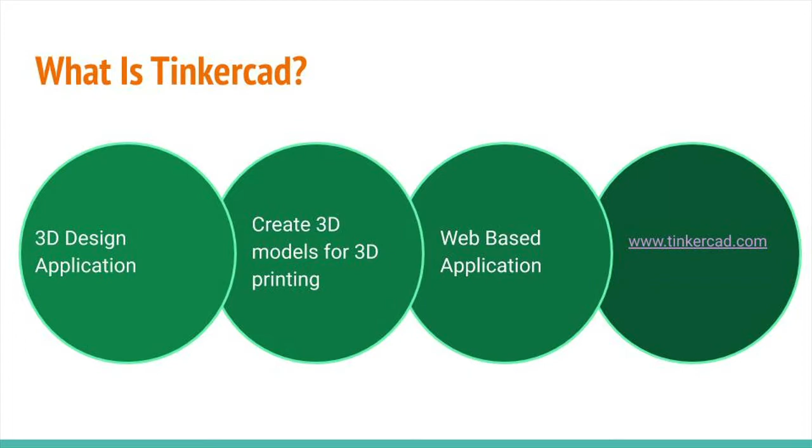Okay, let's start with some basic skills. First, navigate to tinkercad.com in your web browser and click on Sign in the top right.

If you're a new user, you'll need to create a username with a password, or you can use your existing social media accounts to sign in. I will use my Gmail account.

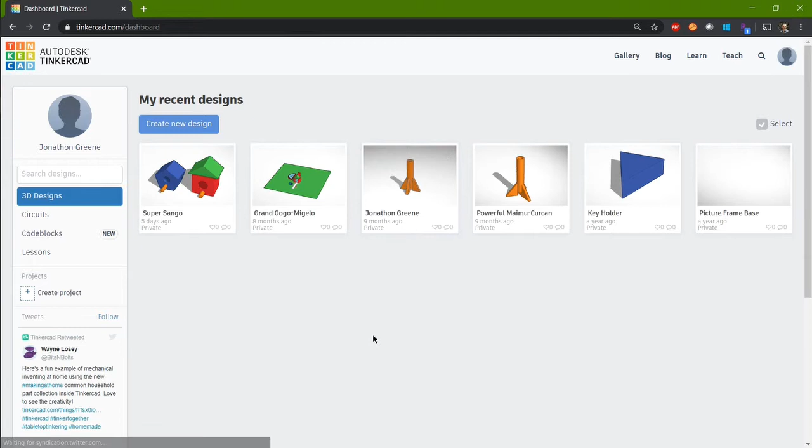Then you'll be brought to your dashboard page where you can see all of your designs. Click on Create New Design.

And now you'll start with a fresh new design. So first, let's learn the basics - how to move around and navigate your new design.

To rotate, you're going to click and hold the right click on your mouse. To pan, you're going to click and hold center click on your mouse if you have a center click.

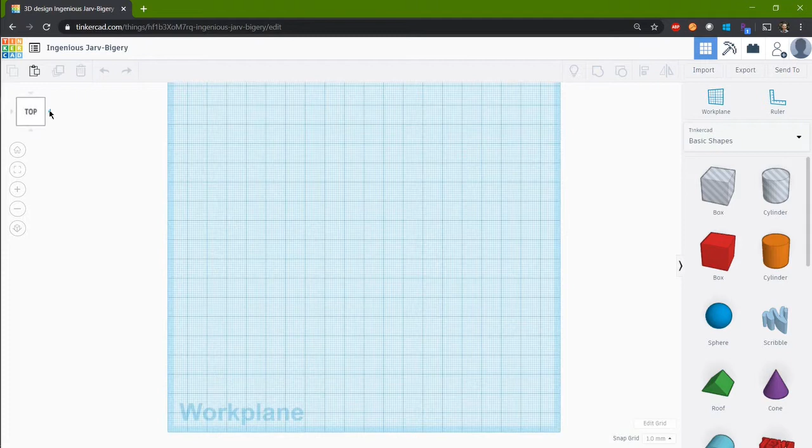Additionally, to rotate, you can also grab the block that represents the workspace in the top left and rotate around. If you'd like to view from the top, you can simply click on the top view, or the right view, or the bottom view, and your view will change.

For now, we're going to view the entire workspace. If you'd like to zoom in and out, you can use the scroll wheel or the plus and minus button if you don't have a mouse.

And it's really important to get used to these navigation skills because we'll need to navigate and move the workspace around quite a bit while we're working with our models.

Okay, you'll see this blue outline called the work plane. This is the space that we will work on. So if I were to grab a shape, such as this box, click on it, and click on somewhere on the work plane, you'll see it places it on the work plane. New shapes will always get placed on the blue work plane.

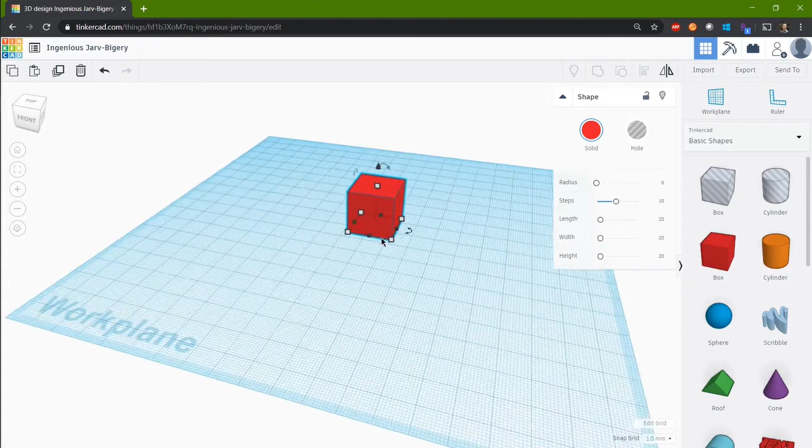Now this shape is a box, and we can control its dimensions by changing the white boxes. So we can change the dimensions to 30 by 30 millimeters by entering the number, or we can click and drag the dimension to change it as well.

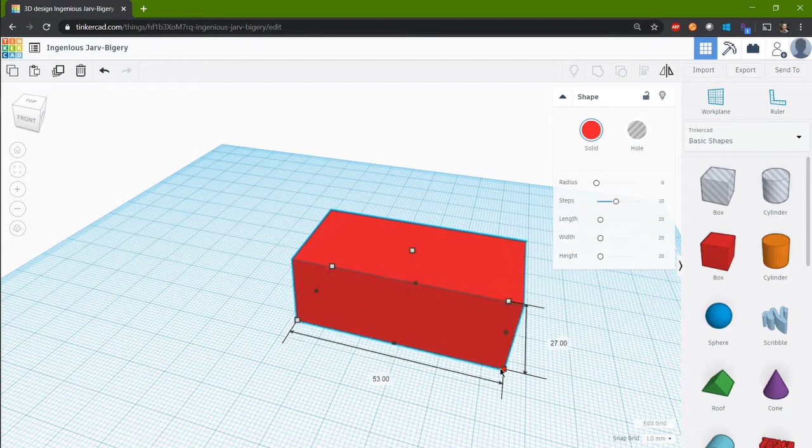The white box on the top will control the height. You'll notice there are arrows. These arrows allow you to rotate the box. We will not use these arrows very often.

The black boxes allow you to control a single dimension at a time, whereas the white box allows you to control 2 dimensions at a time. And finally, the black arrow at the top will allow you to lift the box off the work plane. At any time, you can change the amount that you're lifting the box or the dimension that you're altering by entering a number.

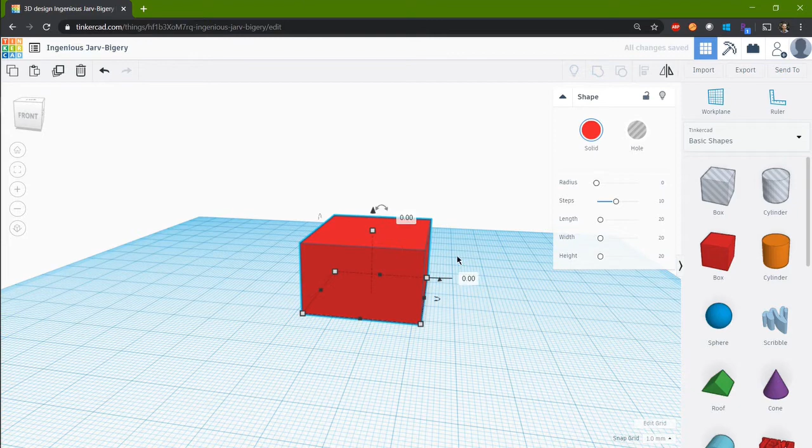Now, say we wanted to select this box. We can use the lasso tool, which is just a left click and hold, and select the box in the viewable area. And now the box is selected again.

If we wanted to copy and paste this box, we can either use the duplicate and repeat button here, or Control C, Control V on the keyboard. And you can see I've made an exact replica of the box.

If I want to delete a box or a shape, I simply select it and press delete, or I can select it and press the trash can button. And of course, if I make a mistake, there's an undo button here, where I can undo and redo my last few actions.

Now, I mentioned earlier that objects are only placed on the work plane. But what if I want to place an object on top of this box? Well, the answer is I would have to move the work plane. So here I would select the work plane tool, and I would move the work plane on top of my box. You can see now it's above the box.

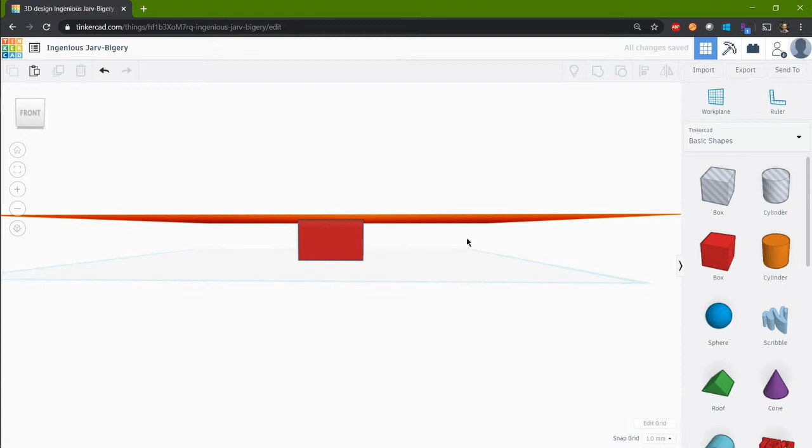Now any object I place is going to be placed on that work plane, which you can see is above the box. And then I can move my work plane back and continue to work with my shapes.

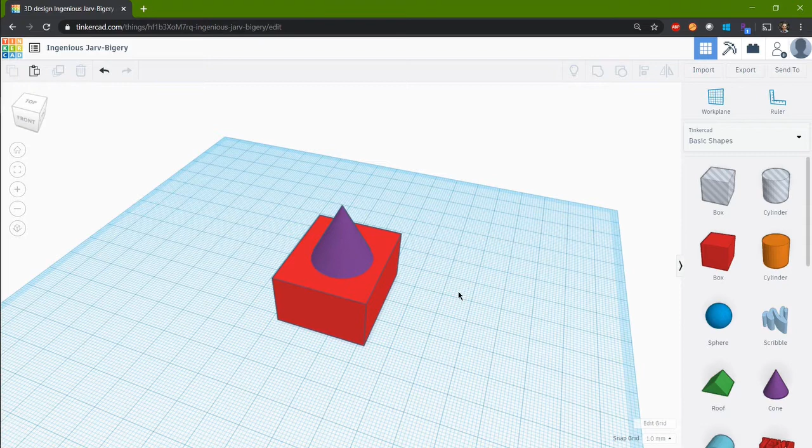So we've covered some basic skills: how to navigate the work plane, how to move the work plane, how to place basic shapes, how to resize basic shapes, how to use the lasso tool, how to copy and paste, and how to move objects onto a new work plane.

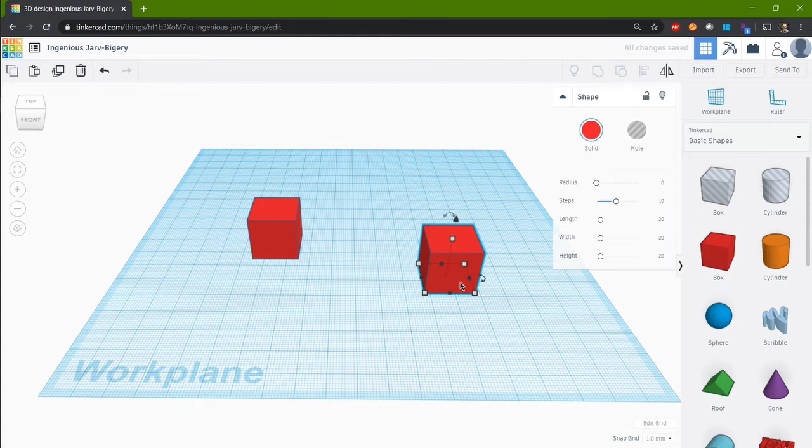Next, we're going to learn an intermediate skill called the Align tool. The Align tool is a precise way to align two basic shapes with each other. So what we're going to do first is we'll place a box, and we'll place another box. We'll change the color of the second box so we can tell the difference between them.

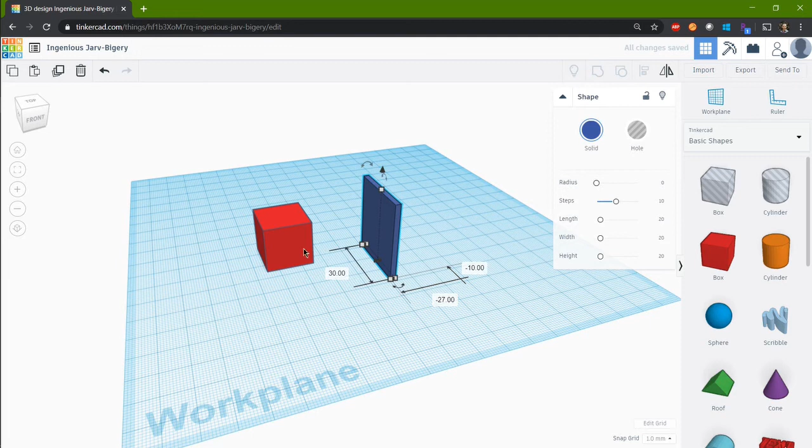And we'll also change the dimensions to be 2, very thin, by 30. We'll also make it a little bit taller. Okay, the object is going to be to align this shape inside this shape. We could use the arrow keys and try and line it up this way and this way. But we may not get it right, and it may prove to be a little difficult. We never know if we're exactly in the center.

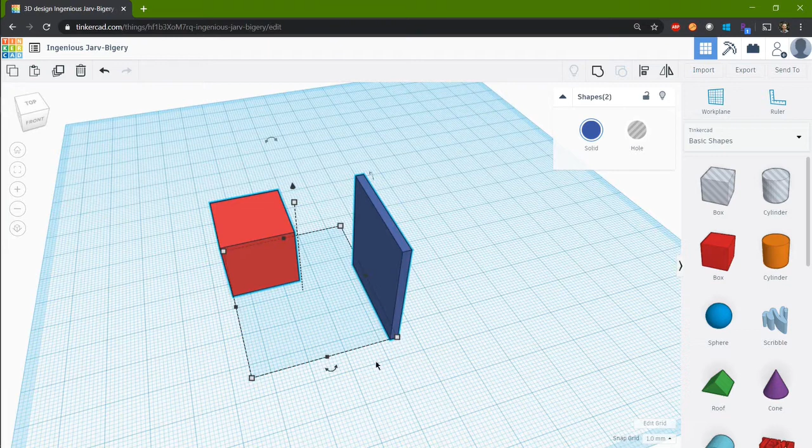So instead, what we'll do is we'll click on one shape, hold Shift, and click on another shape. And now you see we have them both selected. What we'll do is we'll click on the Align tool, or press L as the keyboard shortcut. And this gives us many small black circles. These black circles will help you align the two objects in the direction that the black circle lines are pointed.

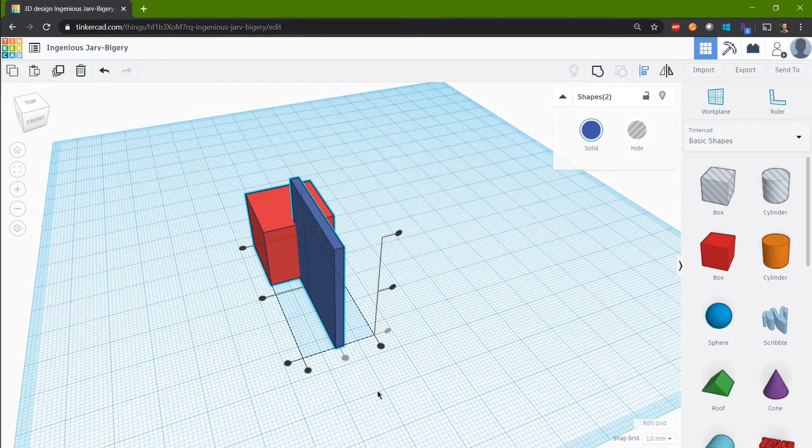So say we want to align in this direction here. We can mouse over one of the black alignment dots to show you in a preview what the objects will look like after we click on them. So this will align about the center of both objects. Notice that the black circle is now grayed out because we can no longer select it as it's already aligned in this direction. Next, we want to align in this direction.

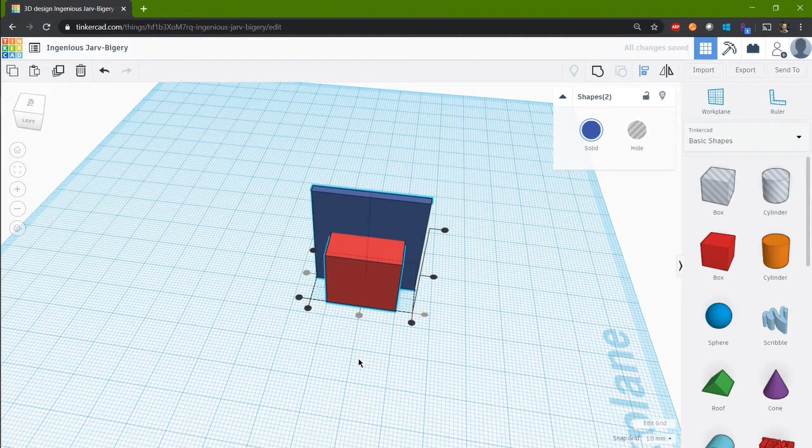If I were to use this black circle, I would align about the left face of the red square and the left face of the blue square. If I wanted to align about the center, I simply click on the center circle. And that's how you use the Align tool.

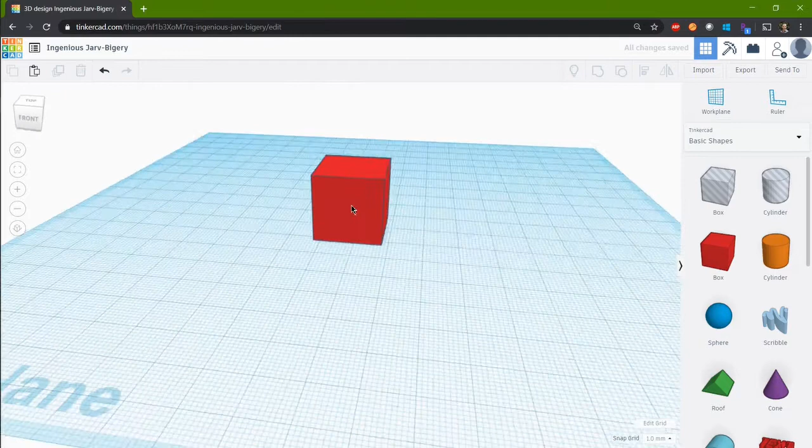A simple way to practice using the Align tool is by building a very simple house. Start with a box as your main floor, and you'll move the work plane to the top of the house and place a roof. Now, the first thing would be to align the roof to the base of the house. So I will select both, press L for align, and make sure that I am aligned about the center in both directions. And now you can see my roof is square to the rest of my house.

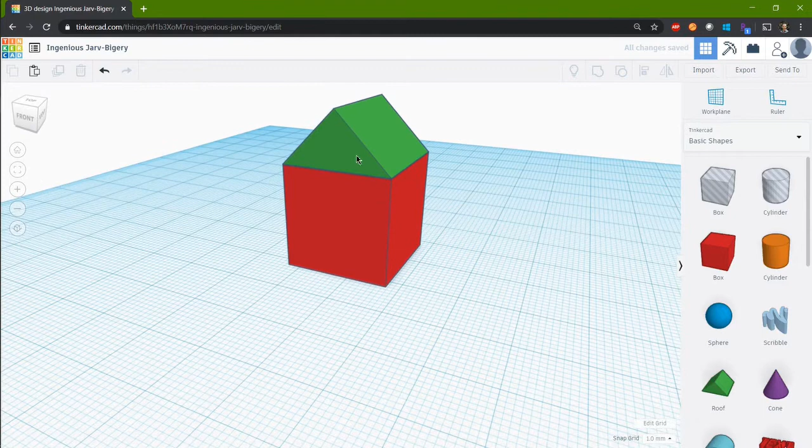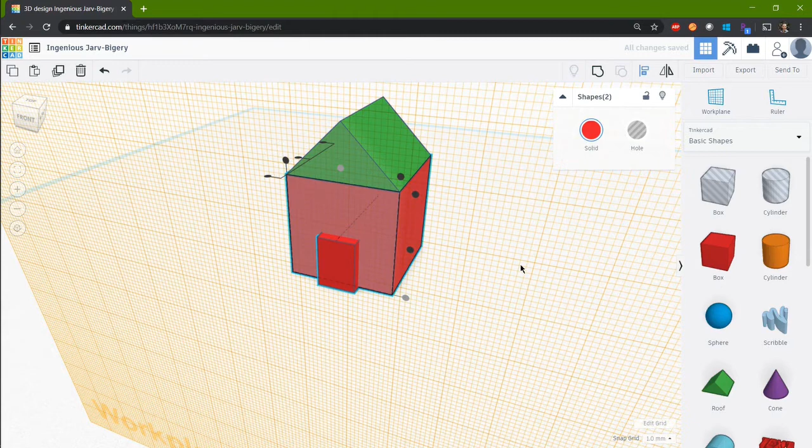As a simple exercise, go and use the workplane tool and basic shapes, as well as align, to build your own house. You can make it as complicated or as simple as you'd like. And remember to have fun while you're doing it.

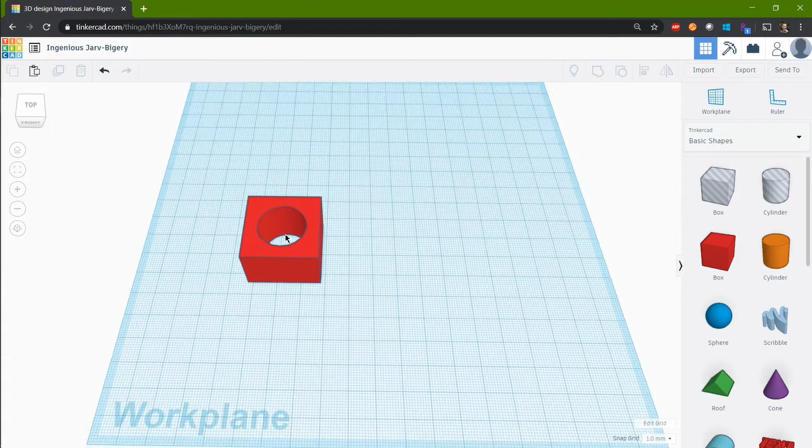Next, we're going to learn a tool called the Group tool. The Group tool will help you create new basic shapes when the basic shape you need is not automatically listed. For instance, this square with a cylinder cut in the middle, as shown on the left. In order to build this part, we need to understand what two basic shapes created it: a box and a cylinder. So let's start with a box. We're going to change the dimensions for this demonstration to 30 by 30.

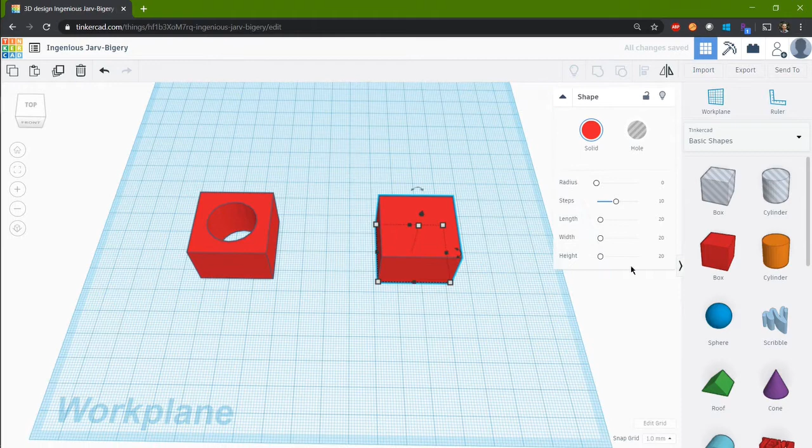And now let's start with a cylinder. Now, instead of this cylinder being a solid, we want to use it to cut a hole in a solid. So we will change the property to hole. And this can be done for any basic shape. Next, we're going to get this hole cylinder in the center of the box. We'll do so by using the Align tool.

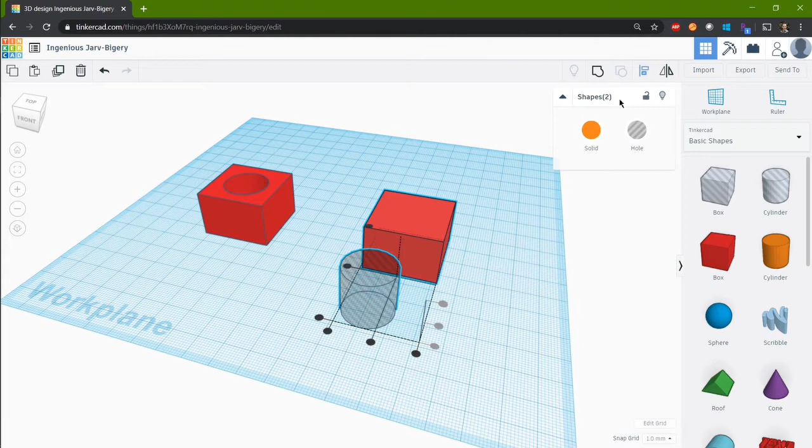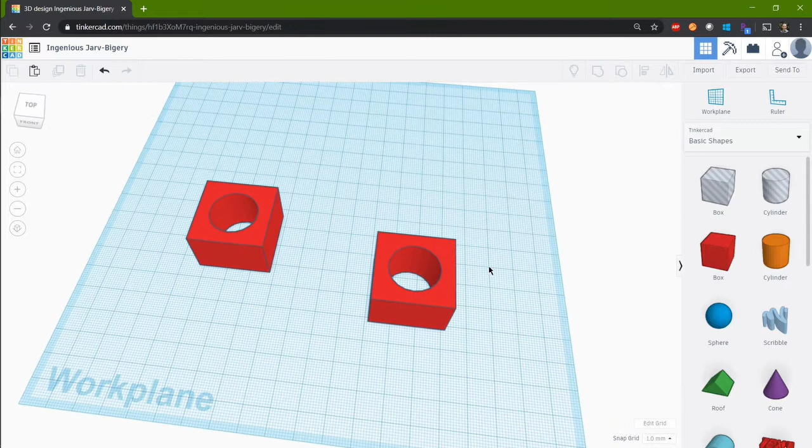Finally, we will take the box and the hole cylinder, select them both using the lasso tool, and we will use the Group tool, which is located up here in the toolbar. Once we click Group, the hole shape will cut a hole in the solid shape. And now you have the shape that we started with on the left. You can also undo your change by ungrouping. And then the two shapes become separate entities once again.

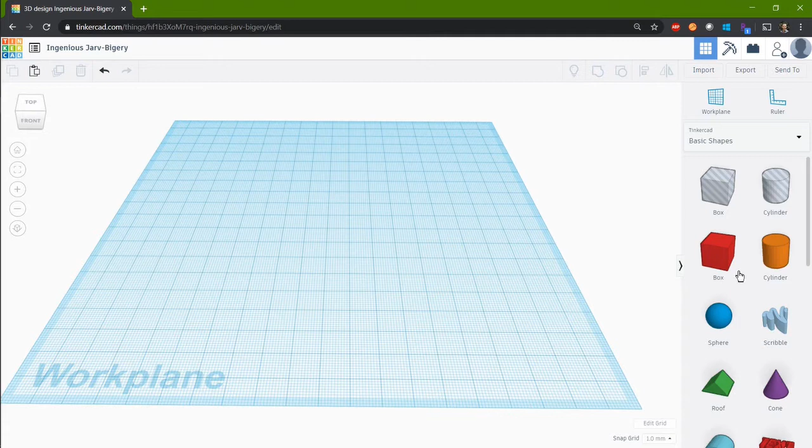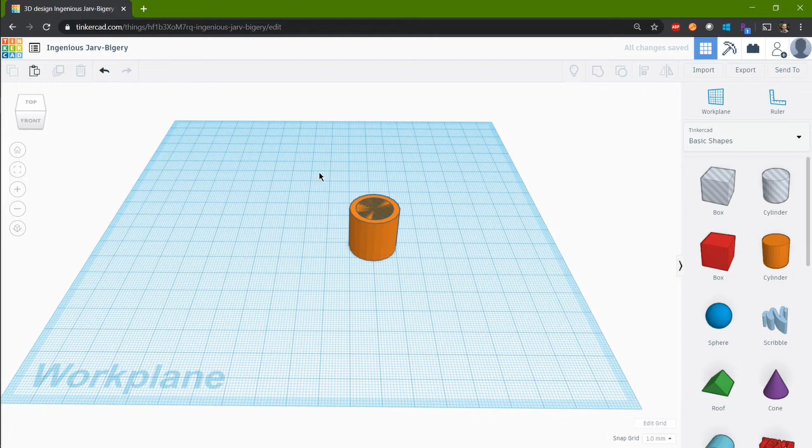A good way to explore the Group tool is by building a very simple cup. Let's start with a cylinder and a cut cylinder. We will make the cut cylinder smaller than the solid cylinder, and we will use the Align tool to align them about their centers. Once they are centrally aligned, we will select them both and click Group. And we don't quite yet have a cup because it has no bottom.

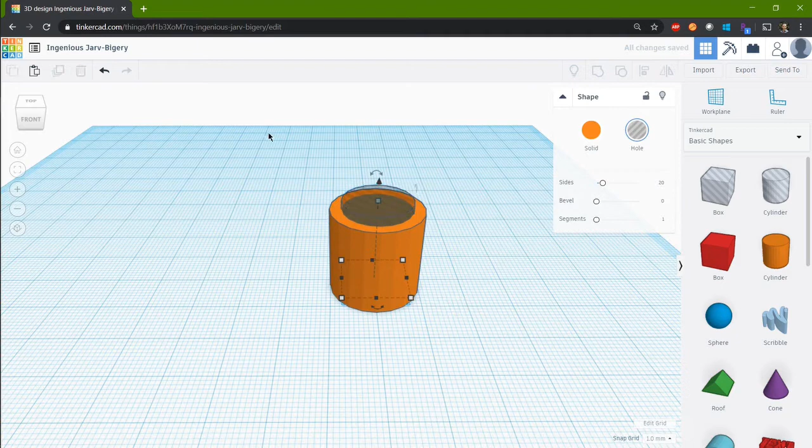So what we will do is we will ungroup, we'll select the cut cylinder, and we will use the black arrow to raise it up just 2 millimeters. We'll select them both and click on the group icon again. And now our cup has a bottom. You can take this demonstration to the next level by using the Group tool to add a handle and make it a mug.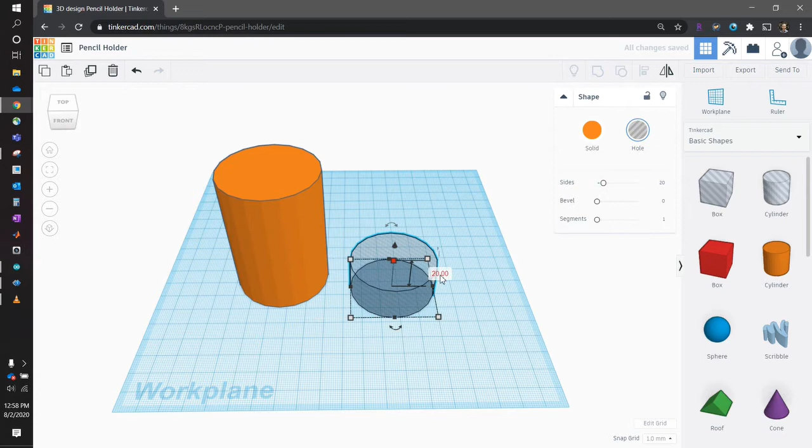You'll notice our cylinders are supposed to be circular at the top, but there are some straight lines along the edge. That's because computers don't actually know how to produce curved lines. They only know how to use straight lines. But computers get around this by using many, many straight lines to replicate what looks like a curved line. You can demonstrate this by increasing the number of sides of each of your cylinders. And as the number of sides gets higher, the more it looks like a circle.

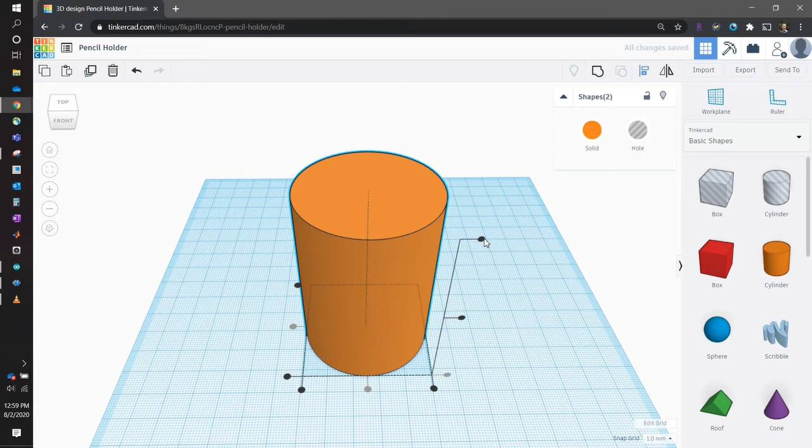Next, we're going to align the cut cylinder inside the solid cylinder using our align tool in this orientation and this orientation, as well as the top. This enables our pencil holder to have a base so your pencils don't fall out. And then finally, you can select both and use the group tool to actually produce the cut.

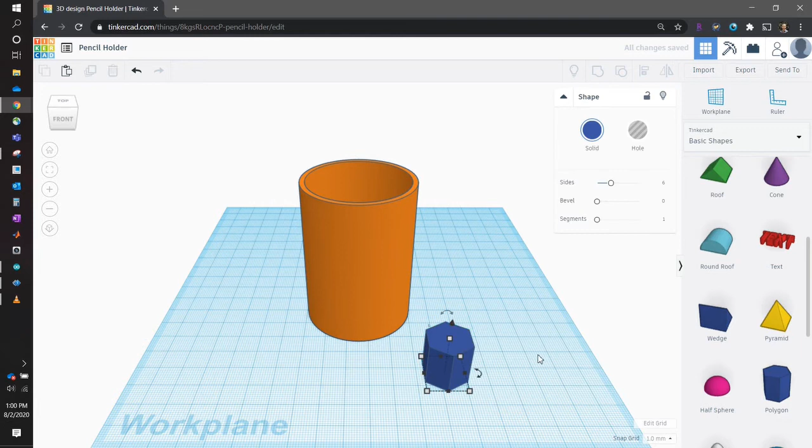Great. Now comes the creative part of our design. Feel free to add any shape that you'd like, but for this demonstration, I'm going to create a series of cutouts on the pencil holder using an octagon. So first I'll grab the polygon tool, and I will change the number of sides on the polygon from 6 to 8. That makes our shape now an octagon.

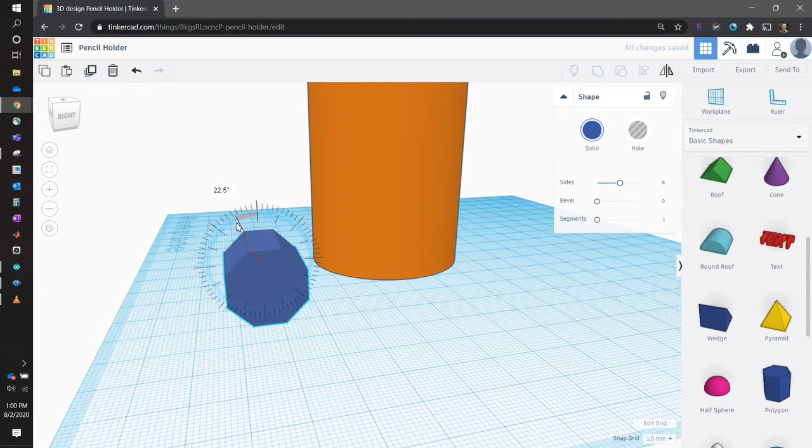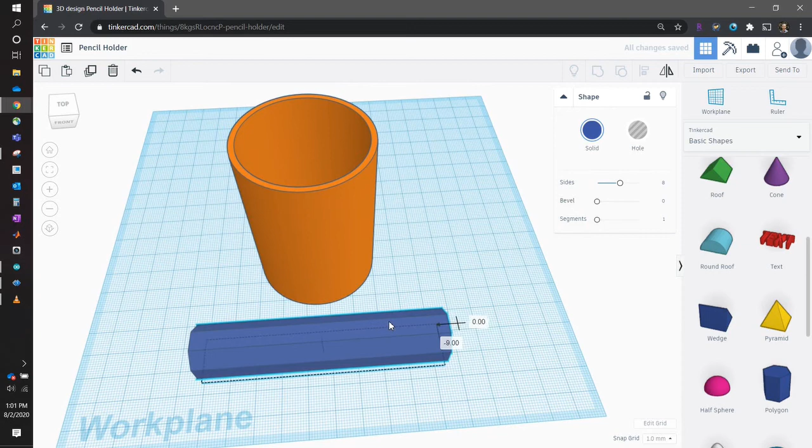Next, I'm going to rotate the octagon 90 degrees in this orientation and 22.5 degrees in this orientation. That way it sits flat on the work plane. Finally, the last thing I'm going to do is increase the length of the octagon. Doesn't matter how much we increase it by, as long as it's longer than the cup of the pencil holder. And you'll see why in just a moment.

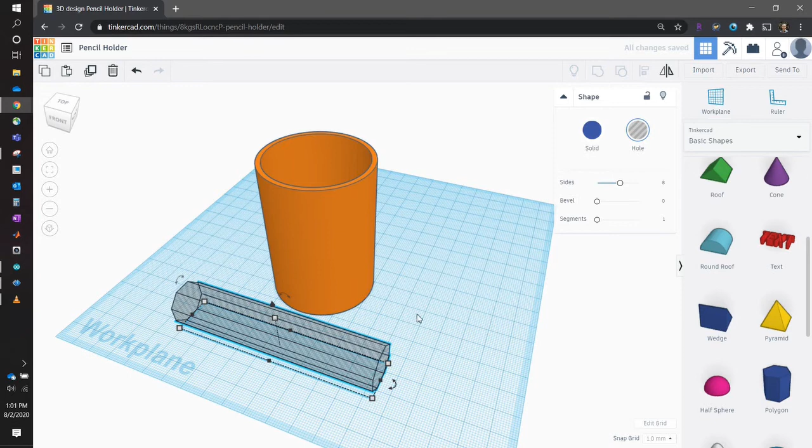Okay, the next step is to change this polygon from a solid to a hole. This is what we're going to use to cut out the shapes in our pencil holder. Then we'll select both the pencil holder base and the polygon, and we'll align them in this orientation and this orientation so it's centered.

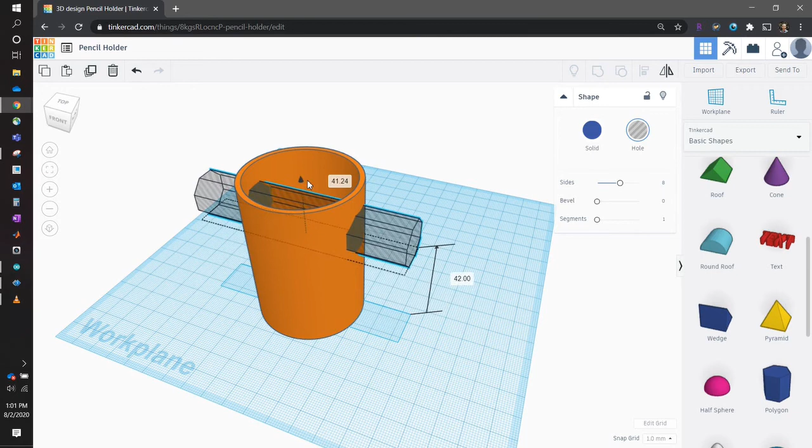Finally, we're going to grab our polygon shape and raise it up to about 42 millimeter. And you now see that if we group these two objects, the polygon is going to cut a shape out of our pencil holder. We can demonstrate this quickly. Now this is very cool, but we do want to repeat this pattern a few more times.

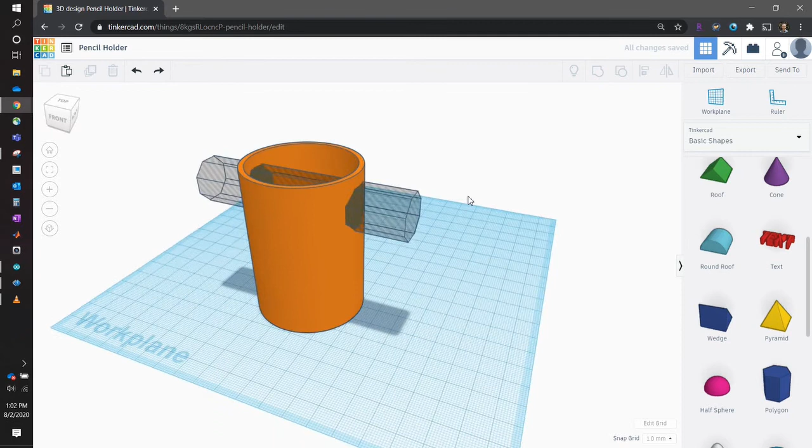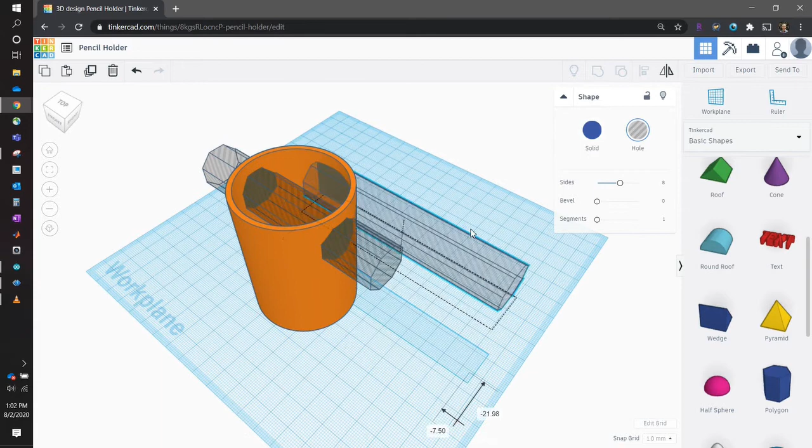So we're going to ungroup what we had just grouped, and we're going to grab our polygon. We're going to copy and paste. To do so, you can either use Control-C for copy, Control-V for paste, or the copy and paste buttons here. We're going to take our shape that was just copied, and move it out of the way, just for a moment.

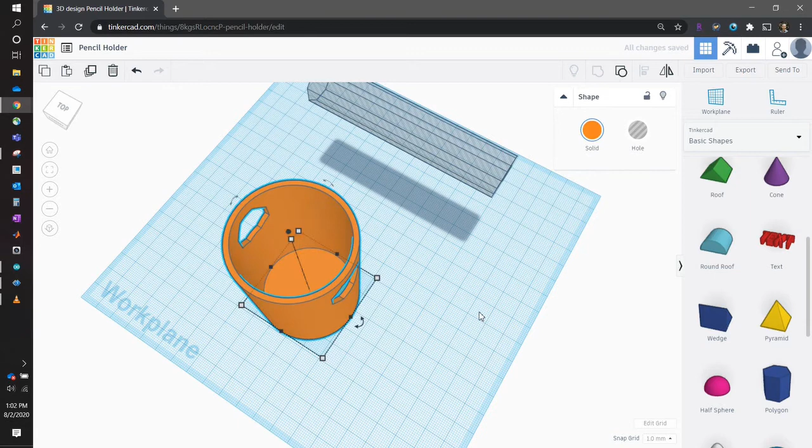Next, we're going to group just the first polygon and the base of the cup holder. And you'll see why in just a moment. Let's go back to our second shape. We're going to rotate it 90 degrees. And we're going to align it with the base of the cup holder, just like we did the first polygon, in this orientation and this orientation.

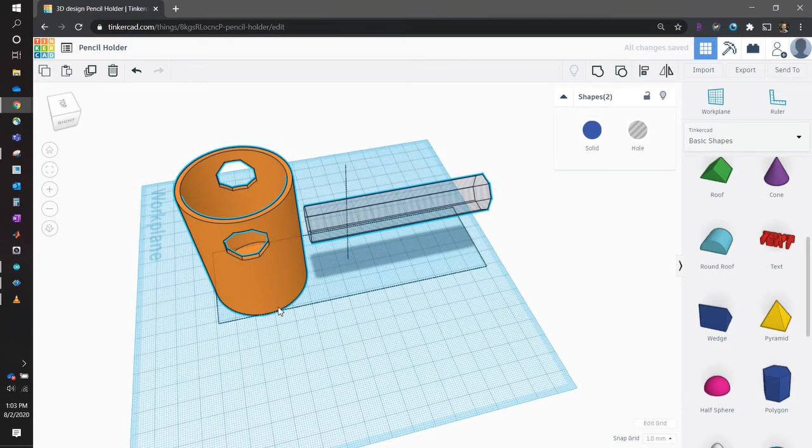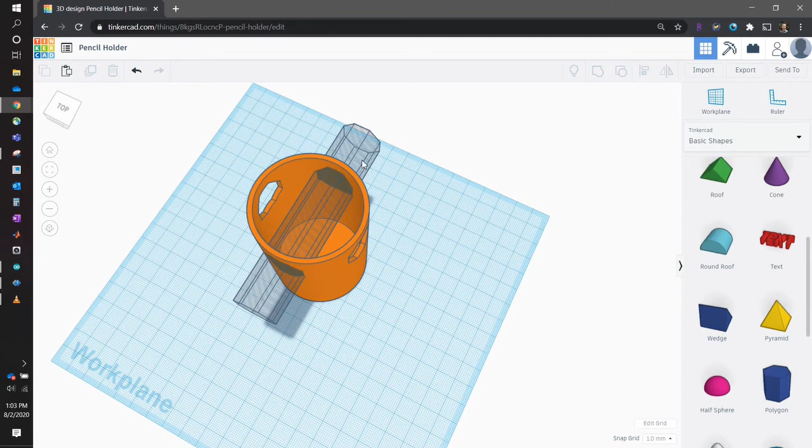And now we have two octagons offset 90 degrees from each other. Now, if we were to group it, it would produce a pattern of cuts that looks pretty cool. We're almost there. We're going to repeat this pattern of octagon cuts along the rest of the height of the piece. But to do so, we need to ungroup twice.

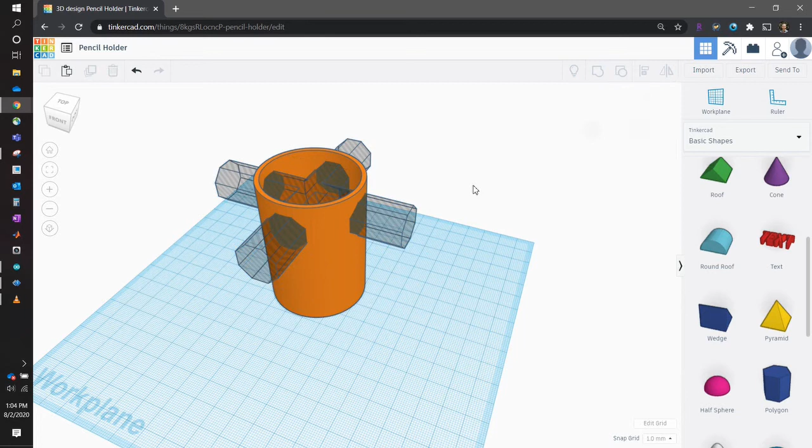We're going to select both of the cut polygons, and group them together. That way, when we copy and paste them, we do half the amount of work because we don't have to do it for each polygon. Select the polygon groups, copy and paste a new set, and we're going to lower the set down by 12 millimeter. Next, we're going to rotate 45 degrees.

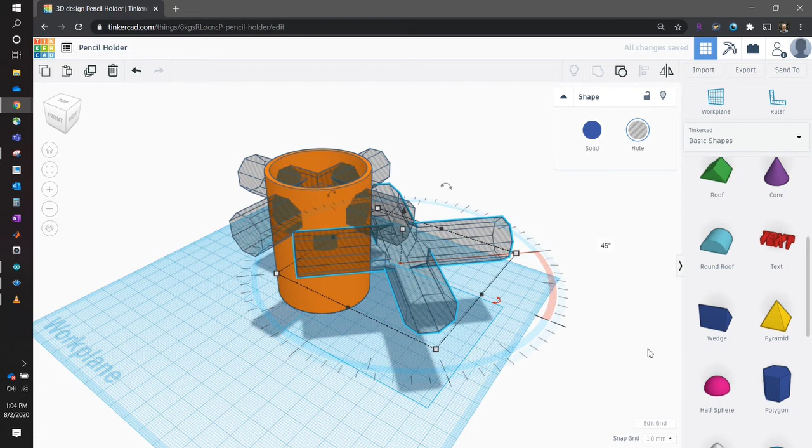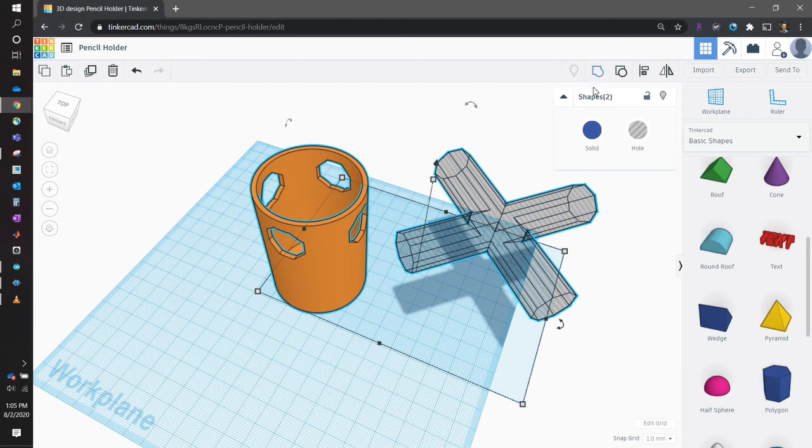Before we align with the pencil holder base, we need to group the previous polygon cut and the pencil holder base so that they don't move separately of each other. Now we can group the new pencil holder base and the new polygon cuts. First by aligning, and then by grouping. And now you see our patterns start to take form.

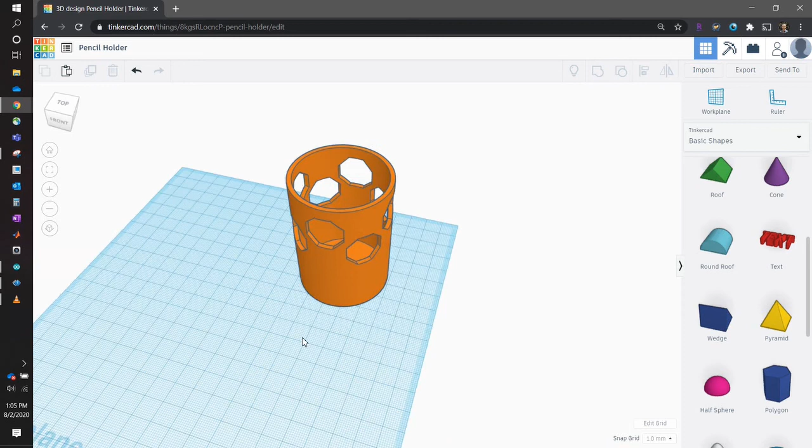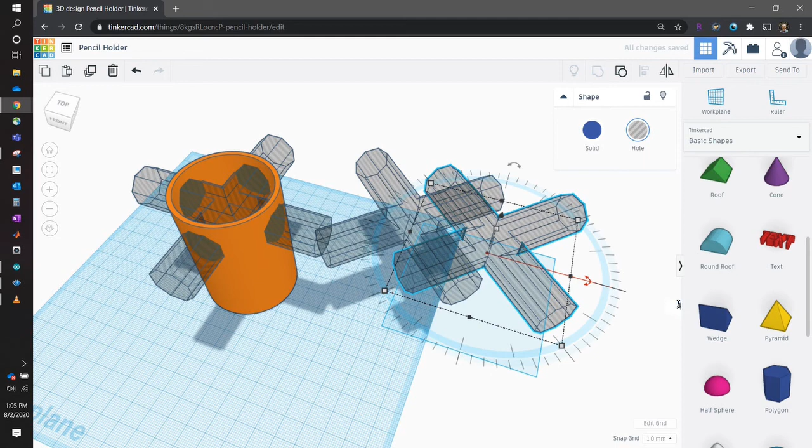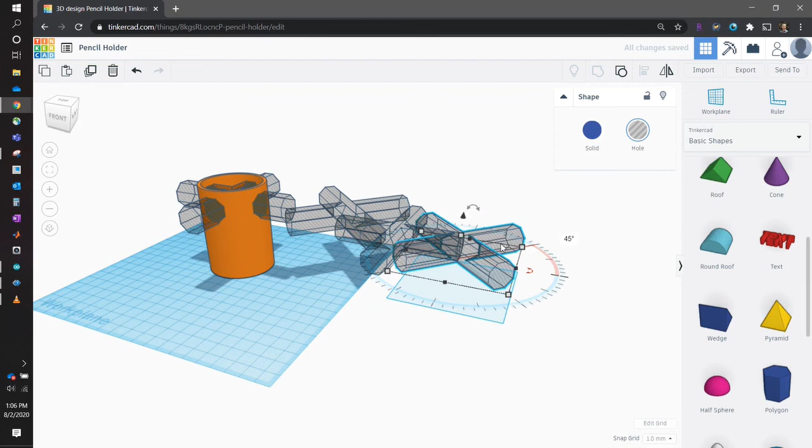And now it's simply a matter of repeating the steps that we have just performed before. So I'll undo my groups. I will copy and paste the latest polygon set. I will rotate 45 degrees. And I will drop it down 12 millimeters. And I will do this one more time. And that should be enough to complete our demonstration.

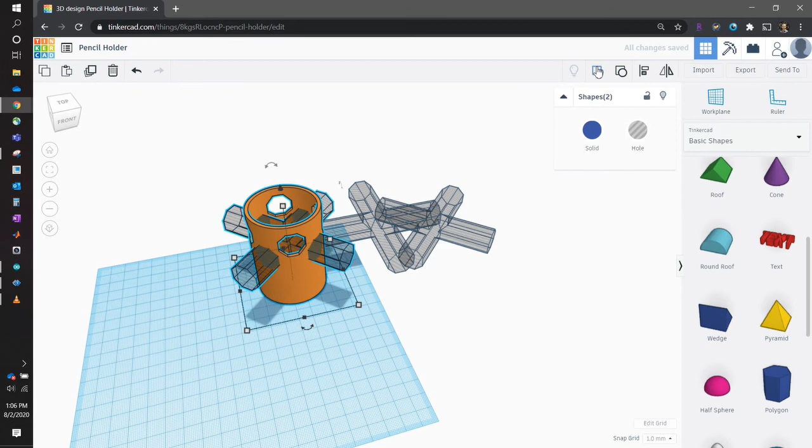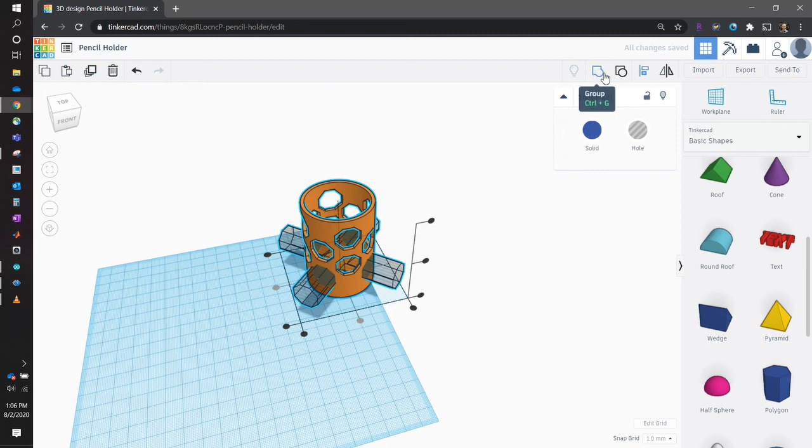So I will group the first polygon cut, then align the second polygon cut again, and group it together. Now I will align the third polygon cut and group it together. And finally, align the fourth polygon cut and group it together. And now you have a pretty cool looking pencil holder.

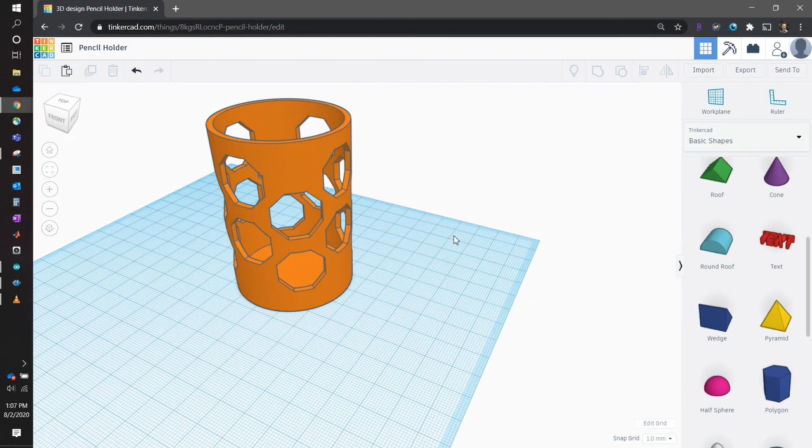Keep in mind, you can use any shape you'd like for the cutouts. You can also alter the dimensions. These dimensions seem to work pretty well for most 3D printers, but feel free to explore.